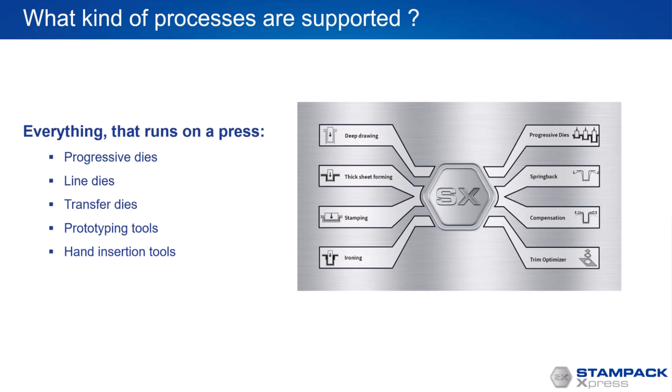Okay, now let's go. First part of today's agenda, how to get the best Springback results. I mean, that's a key question, and we could make an entire webinar on this topic. But I just want to give you a short overview of Stampack solver and why is it different to other solvers on the market. So in Stampack, you can make a shell simulation, and shell simulation means that the sheet is discretized with triangular shell elements in the middle surface.

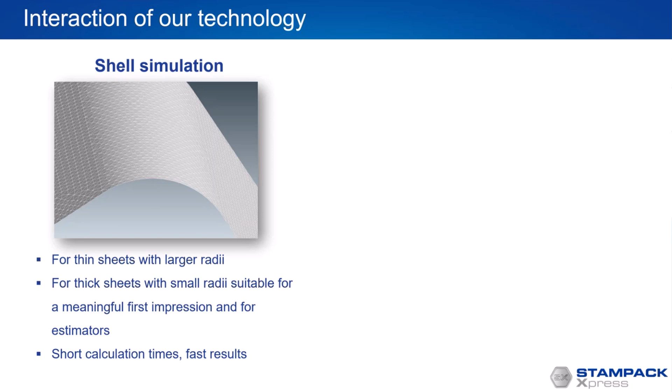And for us, it turns out that for thin sheets with larger radiuses, for example, for car panels, we have very good results in our shell simulation. But when the sheet gets thicker, so 2 millimeters and above, then when you hit the sheet with small radiuses, then the results in shell are not so good. But still, it's quite valuable because computation time is fast. So the benefit of shell simulation is basically, it's fast to run a simulation. You get a fast feedback, and you get a meaningful first impression for every kind of part. So this is what I mean with Stampack Express should have fast computation.

On the contrary, in Stampack, you can also perform a solid simulation. And solid simulation is what I mean with reliable results. Solid simulation, you see here the sheet is covered with hexahedral elements all across the thickness, and you have a very physical contact on the top side and on the bottom side.

And so stresses and strains along the thickness are considered. So you get high precision not only in the plane but also across the thickness. And this is very important in case of thick sheets and very important whenever we speak about compression.

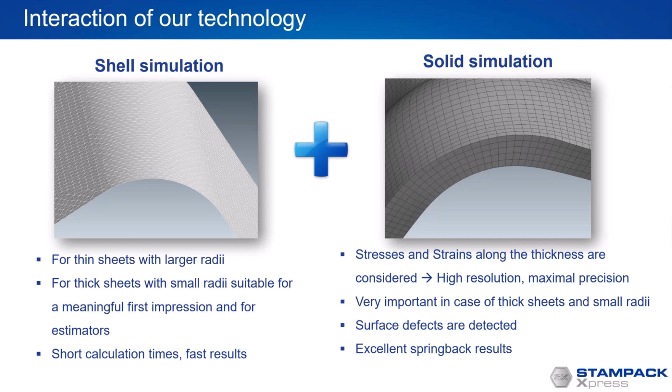A quite nice benefit is that you can also see surface defects, and there is one key aspect that makes sure that very good springback results are only possible in solid simulation, and this is what I try to explain to you now. So due to the physical contact here on top side and on bottom side, you have a very physical compression behavior in solid simulation.

And I have here now a very easy example. So an example that is not difficult at all. And in this example here in this corner, I think the sheet was 2 millimeter in the beginning, and we have a lot of thickening, I think. And at the end, when the press closes, then the thickening is compressed.

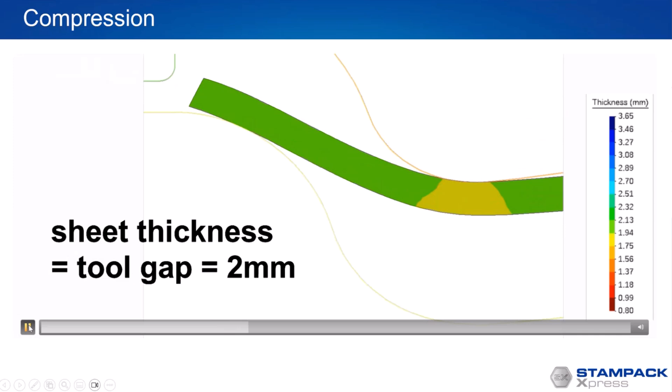And now we will take a look how shell simulation simulates the compression and how solid simulation simulates the compression. And then we will take a look on the springback behavior of this part. So first let's take a look on the cross section in solid simulation. So you have here some thickening, and when the press closes, let's take a look.

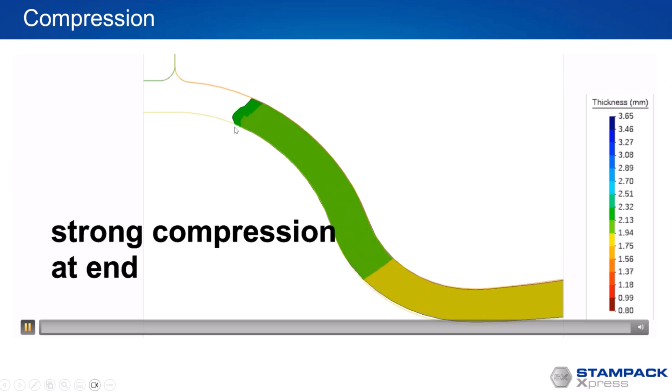Then, let's say by contact, the sheet is compressed, and in the middle of the process, it thickened more than 40%, but at the end of the day, it's fully compressed down. So we need a lot of force to close the press here. And so this is in solid simulation. You see here what I mean with a very physical contact on top and bottom side.

And okay, now we take a look on this very corner that we saw in the cross section some seconds before. And you see here 0.35 millimeter before the press closes, shell simulation and solid simulation have quite comparable results. So a lot of thickening in this corner. And then when the press closes, the solid is compressed, and the shell is not. So the shell cannot show the compression behavior very well.

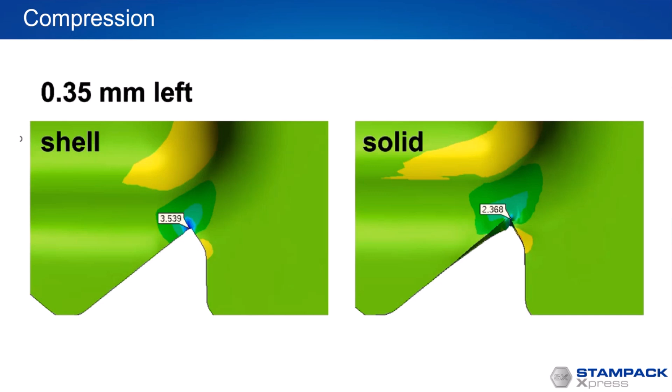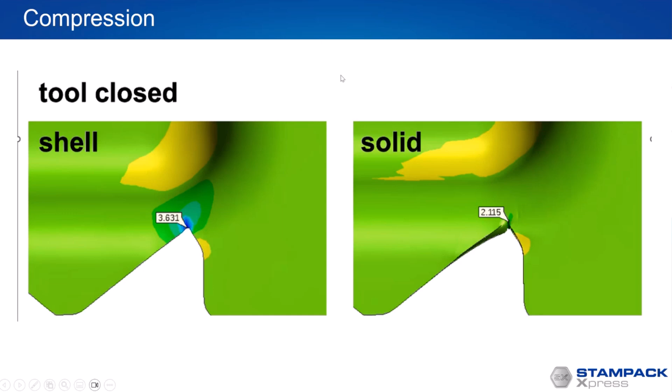And finally, when the tool is closed, you have a huge difference in thickness here between shell and solid. So in solid, you're compressed almost to the initial gap of 2 millimeter, and in shell you still have about 80% thickening. And this effect has a huge effect on the springback afterwards, because you can imagine in solid, when you compress the sheet, you introduce a lot of strains along the thickness that afterwards stabilize the springback because you have more plasticity in the part.

And then when we take a look on the springback displacement in Z direction, then you see, okay, the general behavior is quite comparable between shell simulation and solid simulation. But the magnitude is totally different. So we have here in shell 4 to 6 millimeter springback in this area. In solid, you have only 2.7 millimeter springback in this area.

And you can imagine we want to speak about compensation now. And if you don't have a good result, if you are 2 millimeters off in the springback calculation, you can never compensate this very well. So the key takeaway should be at this point, to have excellent springback results, you need solid simulation, and the better your springback results are, the better your compensation is in the real world.

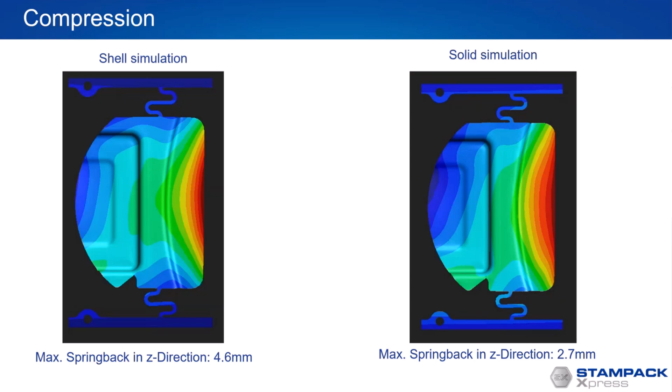I mean, this shell and solid is a deep topic, but we will push on now to springback compensation. And we start with a short explanation. What is springback compensation? And I try to explain it in a nutshell. So our initial situation is typically like this. I have here a nominal part, and typically in the first attempt, we form the part to the nominal part. We take the part out of the press, and it sort of jumps up.

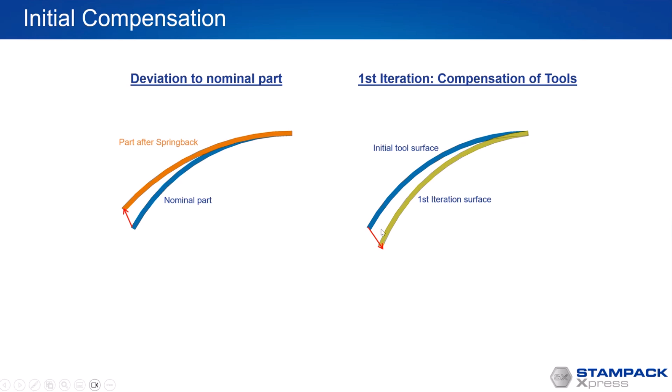And so we get here a deviation vector, and the first approach to compensate the tools: the initial tools here on the right-hand side are typically at the same position as the nominal part. But we compensate in the reverse direction to get better tool surfaces that, let's say, counteract the springback. So we sort of measure the deviation field and apply it in the other direction. So this is the first attempt.

And in the second attempt, we will find that when we form the part to this shape, again, we have some jumping up, and we are closer to the nominal blue, but still we have a deviation that is hopefully much smaller than it was before.

And in the next attempt, we just apply this short deviation field, and we apply it again to the tools to get, let's say, the tool surfaces of the next iteration. And in this way, in a very iterative procedure, I try to improve my tool surfaces so that I'm at the end of the day very close to the nominal part, and that my part is in tolerance after springback.

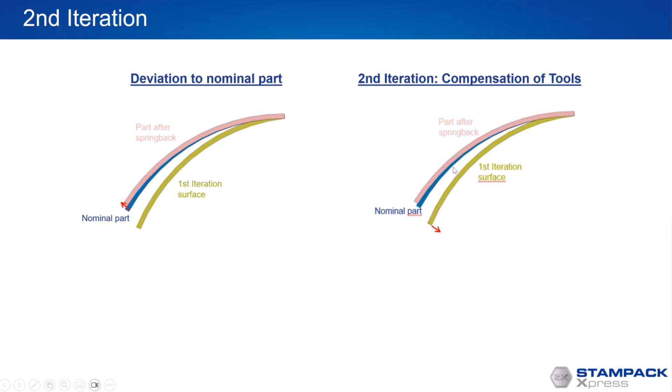So what you have to know is before springback, I'm far away from the nominal, but after springback, as it is in real world, I should be in tolerance with the nominal part. And the takeaway of this short description in a nutshell should be that springback compensation does not reduce the springback at all. It counteracts springback, and it counteracts springback in the opposite way.

And I have seen in many softwares the possibility to counteract, for example, with a factor of 1.1 or 1.2. And people claim that they have very good results with this, but it's not true because in some areas you need to compensate 1.1 times the first iteration. In some areas you need to compensate with 1.2 times the first deviation, and since we have these differences all over the sheet, we need to apply it in a very iterative way, so that we step by step locally improve the part until it's in tolerance.

What we can learn also from this description is that we need some sort of measurement functionality. And I think you all know that measurement is a very, very deep topic, and you can spend years on measurement, and it makes a key difference how to measure springback and how to measure the deviation to the nominal part. But for sake of simplicity, we will not touch this deep topic in today's webinar. So if you have questions or remarks on this, please contact me after the webinar.

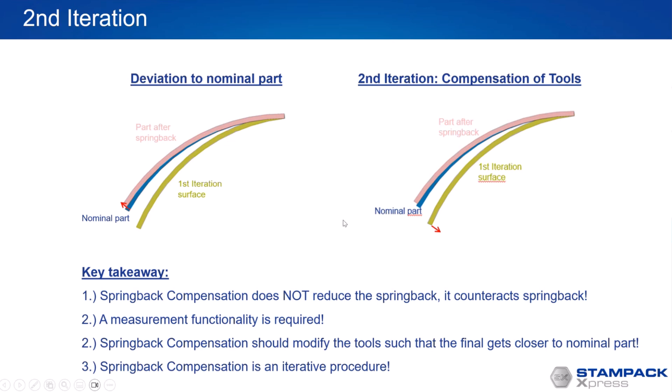Okay, quite clear is that springback compensation should modify also the tools, and it should modify the tools in such a way that we can perform the iterations one by one without touching the surfaces manually. So we want to not touch the surfaces between the iterations, and this is what Stampack's compensation does.

What are then the key properties of Stampack's compensation algorithm? So basically, Stampack's compensation algorithm takes 5 steps that are each very interesting and very deep. So the first one is what we call the tolerance check. So it's a measurement of the deviation to the nominal part. Then next, the tools are compensated to counteract the springback.

So we take the deviation vector from the tolerance check, and we revert it on the tools, and we make sure that our algorithm is iteratively applicable, which means that we can rerun the simulation at any time with the new tools. And then there are 3 specialties in our algorithm that are all very interesting, and we will discuss them in what follows.

So the Stampack algorithm avoids undercut in vertical walls. It allows constraint areas on the tools, and it is length of line preserving. And I think we should speak about this in detail.

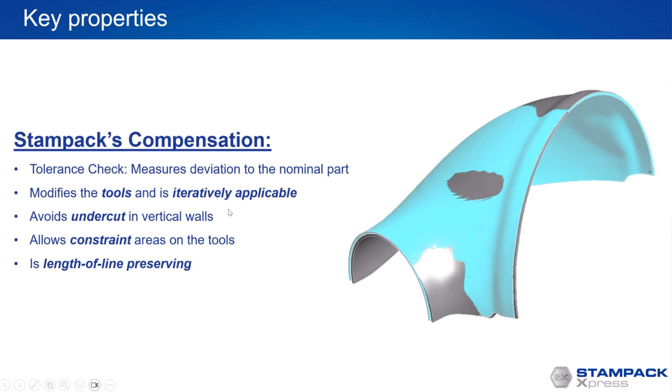So first, just that you get a feeling for how the measurement looks in Stampack. So measurement means I import a nominal part and I perform a measurement against it, and I get here a color map, and I see exactly how far I am away from the nominal in each part of the sheet. And this is very convenient because typically I know from my CAD drawings, okay, here my tolerance is maybe 0.5, here it's 0.6, here is 0.1, and then I simply can take a look here on the color map, and I can check the tolerance in a very easy way.

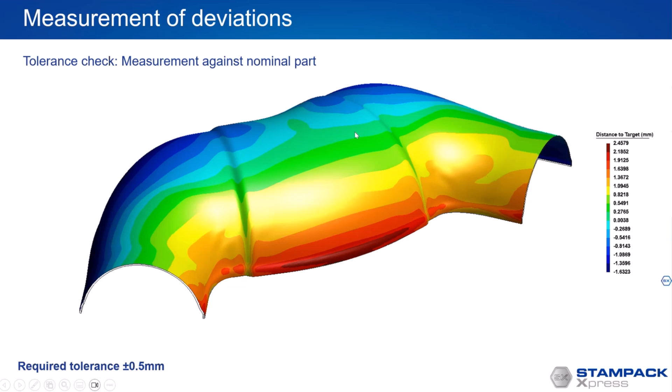Okay, I think it's quite clear what I mean with modify the tools, and that's why I jumped directly to the topic of undercut, or some people also know this under the wording negative angle. And in springback compensation, we typically have an issue whenever a vertical wall is involved. So in this part, we have a vertical wall all around the part. And I think you all know that when you have a vertical wall and you have to compensate this, it might be that you are in trouble because you fall into negative angle.

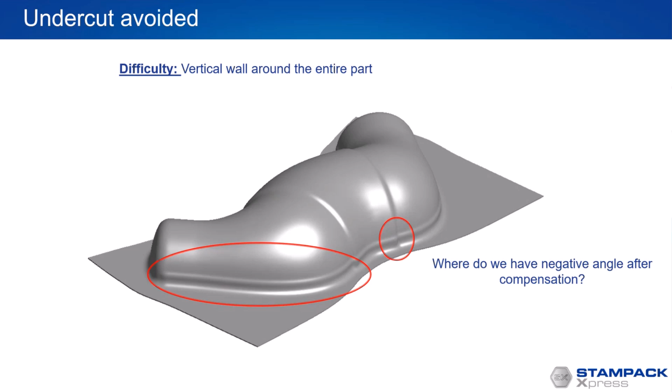But when you do this by hand, how can you know where you have negative angle? It's completely unclear. I mean, it could be here, it could be here. At the end of the day, we simply don't know. And that's why we integrated a functionality that we call remove undercut, and it's just a checkbox to activate. And with this, you can avoid the undercut.

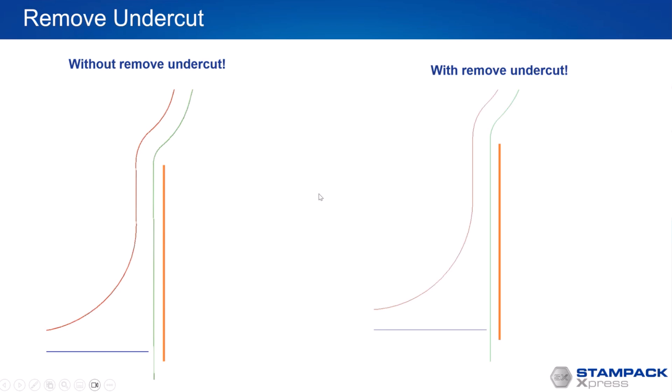Okay. What is also a key step in Springback compensation is that we cannot compensate all the surfaces, because in a part like this, you have here the blank holder area, and this is typically the draw-in area where the sheet is at the beginning of the simulation, and you need a very smooth draw-in in the whole part. And if we would allow compensation in this area, this surface would get a little wavy, I would say. And this is completely forbidden. So we need a tool that says, okay, in this area, compensation is not allowed at all.

And in Stampack, it works in the following way. So here on the blank holder, we can say, okay, we don't allow compensation here. We constrain X, Y, and Z, and we fix it so that we don't have compensation at all. So this is mandatory for a good compensation of tools.

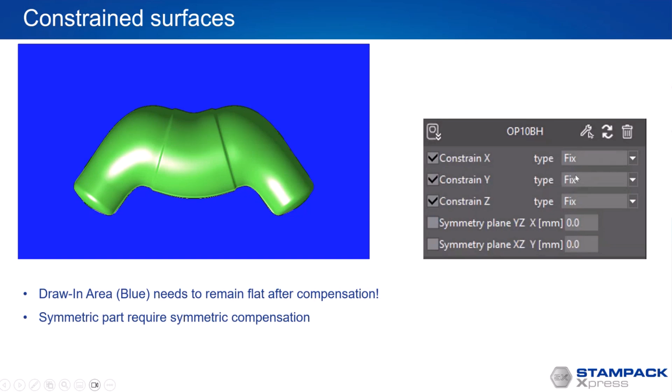And what is also very interesting, especially for symmetric parts: when I have a symmetric part, I will want to compensate on the left-hand side in the same way as on the right-hand side. That's why we also have these symmetry constraints, but they are less important than the fixing constraints that I need in almost every compensation procedure.

And how does it work? I have here an example to explain it. So here on the left-hand side, we have an unconstrained area where we perform a normal compensation. And imagine here on the blank holder, we have the constraint, so we don't allow the compensation here. And I think it's immediately clear to you that this cannot work, because when I have compensation here and no compensation here, there would be a very sharp border between these areas.

So I need a smoothing zone in between where I interpolate between the compensation area and the non-compensation area. And this is a smoothing zone. We apply this smoothing zone automatically, so the user does not have to take care of it. It's very convenient to use because from our software point of view, the user does not really see this smoothing zone, but it exists. And when you think about it, it is clear that it has to exist.

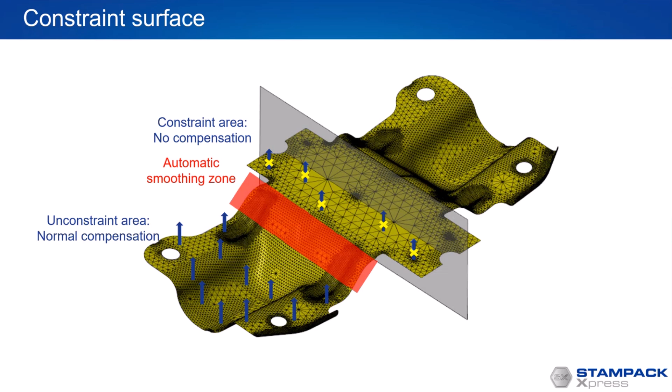And the last thing, and that's also very special to Stampack's algorithm, is what I call length of line preserving Springback compensation. This can be explained very well in this top hat profile. It's made of high strength steel, has a lot of Springback, and I think it's 20 millimeters here. This is the part after Springback. This is the compensated part.

And when you compensate this in a naive way with a simple projection, like compensation tools in CAD software do it, then the length of this line here is increased by the projection. You have a nominal in between, it's simply projected downwards, and then the lines get longer. But this is not working well, because imagine we make 4 iterations in our Springback compensation, and each time we add 15 millimeters here, so it does not make any sense.

I know that this is a part especially designed to show this effect, but even if you just compensate 5 millimeters, and in each iteration you add 0.5 millimeters, then after 4 iterations you added 2 millimeters of length on the lines, and you get a completely different part, and you can never be in tolerance. So it's a key feature of Stampack's algorithm that we preserve the length of line.

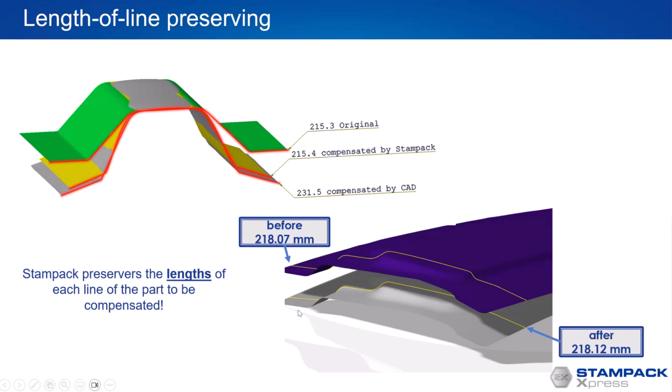Just to give you some examples. Our compensation algorithm is now on the market for I think 1.5 years, and I would simply like to share some customer experience with you, where you just see the progress on how quick the compensation is converging.

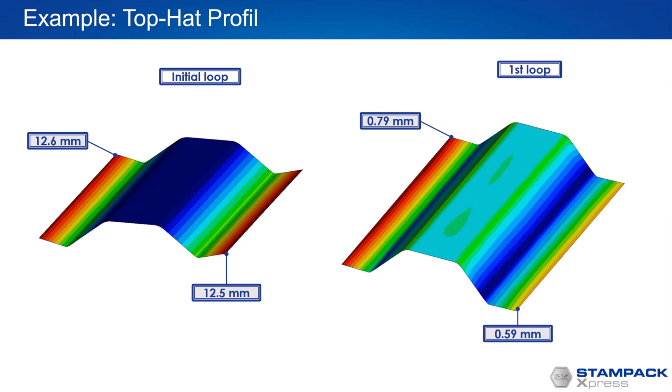So we have here a version of the top hat profile we spoke about. It's 12.5 millimeter springback, and already in the first loop we could get a deviation of 0.59 to the nominal and 0.79 to the nominal here in the other corner. So in this kind of very easy part, we have a very fast converging behavior, and you don't need many iterations. In more real-world examples, it's a little different.

So this is a B pillar, for example. In the B, I think we had a maximum deviation of 4.48 here in the corner, and then you see how the algorithm works. So here it sort of overcompensated in the other direction. So we were above the part. Now we are here below the part, and only in the second iteration we jump now very close to the part as it should be.

And this is also something typical, that the convergence is a little unstable, in the sense that it's somehow overcompensating, and then step by step you come back and get better. But I think after 2 loops this is still perfectly all right.

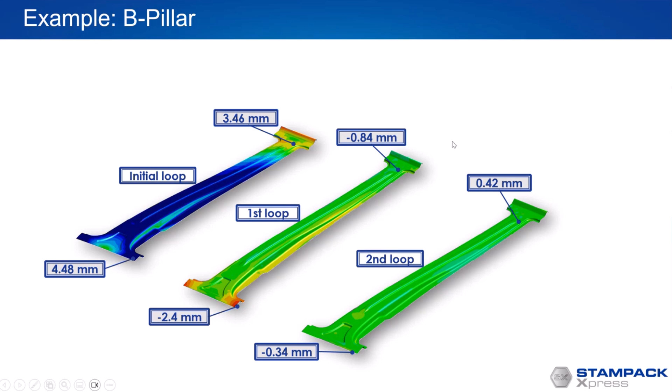And another example that I really like is an example of the company Pengfei in China. Here they had 2.8 millimeter springback on this part, but the part is special in the sense that it looks extremely easy. If you give this to anybody, maybe they will say, okay, you don't have to use simulation software at all. But they had very strict tolerances on it. I think the tolerance was 0.3 millimeter. And when you have these kinds of strict tolerances, then you have to go for it, and the easy part gets very, very difficult.

And here you can see how our compensation algorithm converged to the final goal. Here in the corner, it went down quite step by step. And here in the middle, it sort of overcompensated in the first attempt and then started to converge. So you see here also that the behavior is locally different. Here we have a very smooth transition, and here it's a little wavy. But this is very typical for a compensation, and with this you see that you cannot work without an iterative compensation approach.

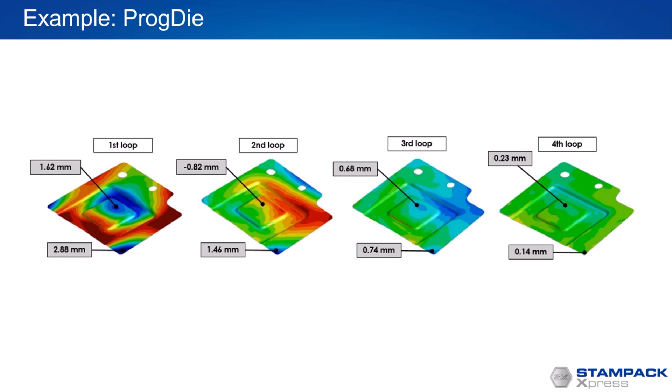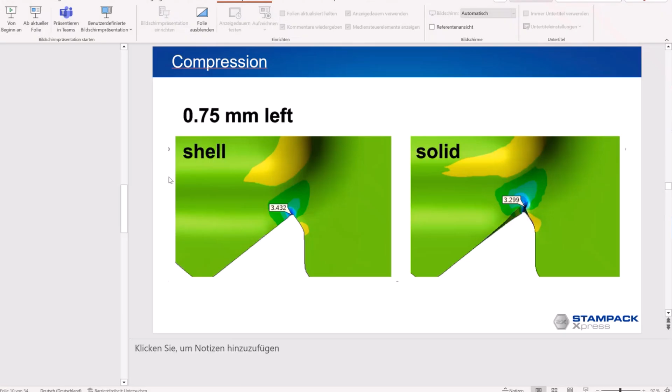Okay, that's it for the moment. I think we should now switch to Stampack, to the software, and I show you how to define a springback compensation, and then we can take a look on a result. And afterwards, I make some concluding remarks. So I prepared here a simulation for you; I don't want to define a simulation with you. We start to take a look on the process I have here; the simulation is already calculated. It's forming, cutting, springback, and I introduce you to the process, and then we check how we can define the compensation. So let's load it.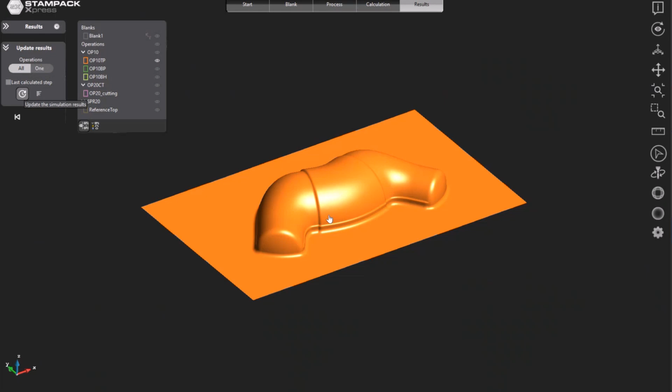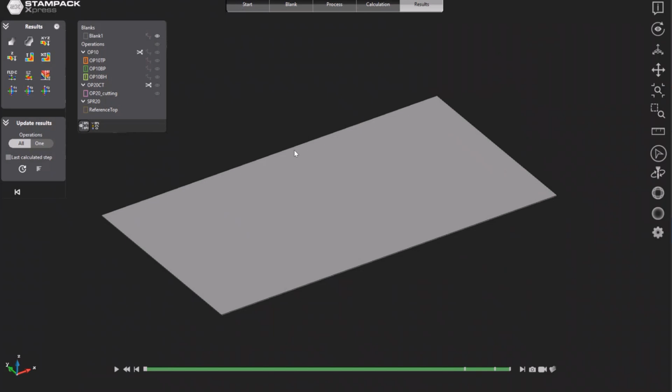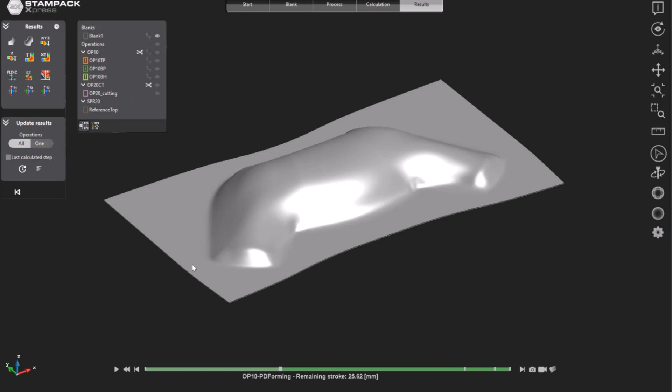So this is a very typical drawing part. I think it's 500 millimeters, a part that is in the exhaust system at the end. Just so you get a feeling how the part is formed, it's a classical drawing. You see here the blank holder area, and this is flat, and it has to remain flat also afterwards, after we compensated the tools, just to guarantee the optimal draw-in behavior of the material. And step by step, the part is formed. Then we have a cutting, and then we have a springback.

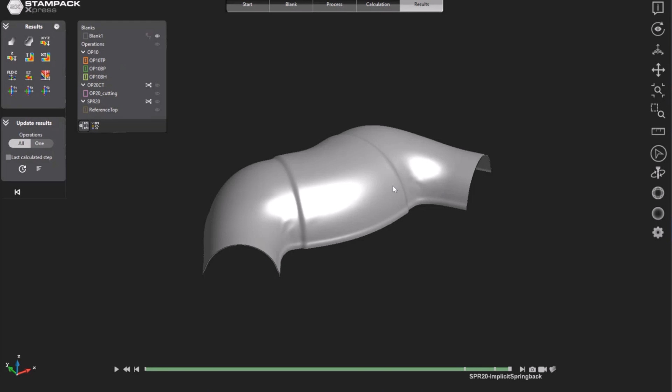And you have a lot of possibilities here in Stampack, and I think you all know about it. You can check whether the part is feasible or not. You can check the thickness behavior. You can check the wrinkling, but we will not do this today. We just do one thing: we have here imported a reference, and the part is measured against the reference. I think here it's the top side.

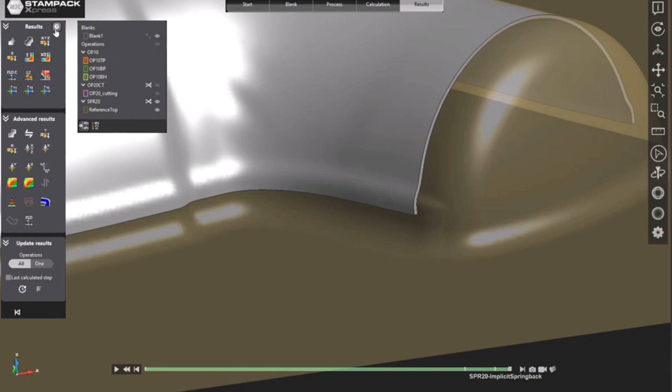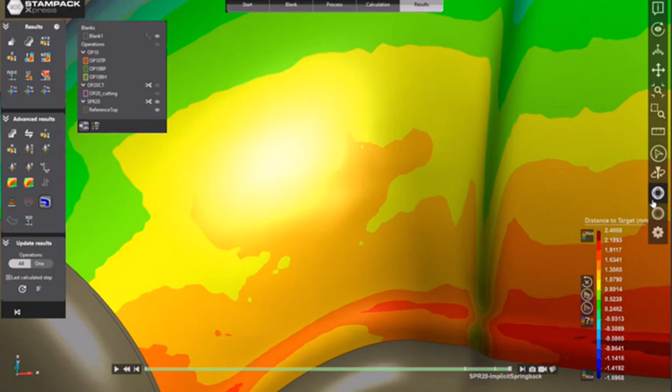It's measured against the top side of the tool, and with this color map, with this distance to target or tolerance check, you can see the deviations after springback. And you see here that we are 2.2 millimeters off, and in each point in the mesh you can visualize the distance to the nominal, and it's clear that we have to do something at this point.

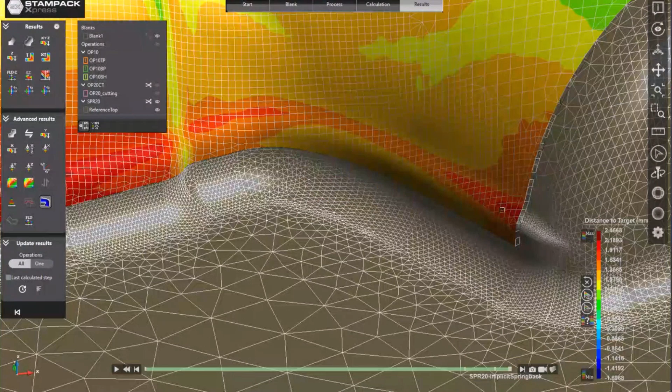I think the tolerance here in this area was maybe 0.5, and I think here more outside it was 0.75 or something like this. But definitely we have to counteract the springback. And now we will take a look how to do this.

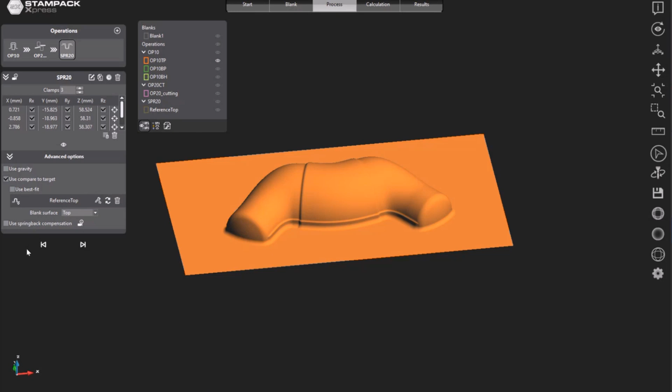So I go back to the pre-process, and we are here in the springback operation. So here's the forming, cutting, springback, and in the springback what is already defined is our tolerance check, that is the compare to target functionality. And what we are going to do now is we use here the springback compensation. And to do it, I have to import the tools that I want to compensate.

So we have here the top, the bottom, and the blank holder, and in this case they are imported as Parasolid files. So the ending was x_t, but equally you can import CATIA, NX, Creo, STL, IGES, STEP. So you have the full freedom here. And okay, I import them. And I have them now here in the so-called warehouse. And warehouse is a location for geometries that are not yet assigned.

And I pick them, and then let's say I add them to the compensation surfaces. And I have three possibilities. So I can add a compensation surface. In this area, this surface is compensated as it is. I can add a constraint surface. So constraint surface is what we will do with a blank holder. We will take a look on it in a second.

And we can import also cutting lines. And this is because in some processes, we also have to arrange the cutting line, because when we compensate differently and we have, for example, a laser cutting, then we also have to change the cutting a little. I think that's quite clear.

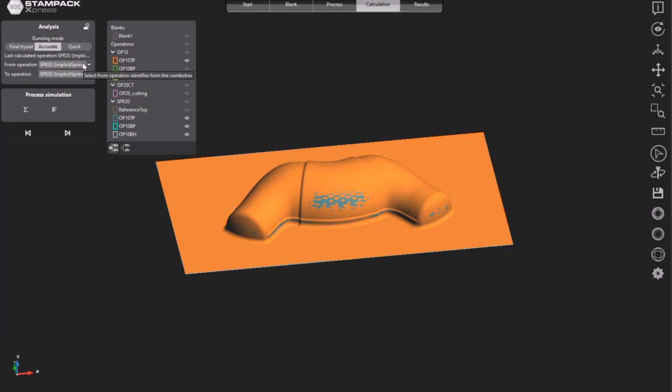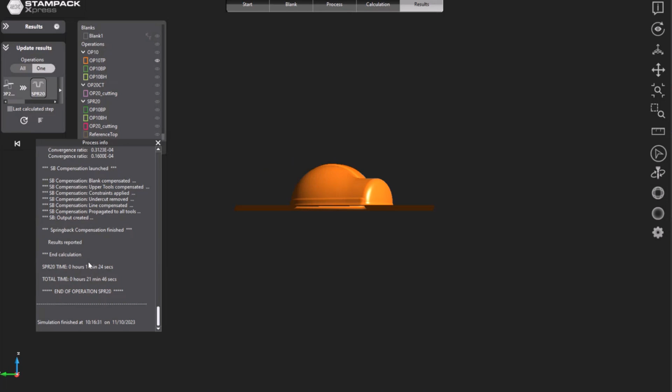And now we have to press on calculate. We just have to recalculate the springback operation and the compensation. And I don't want to do this right now because I calculated it already for you. Let's take a look. The compensation time was 1 minute and 24 seconds. The total simulation time, this was simulated in solid, was 21 minutes, just to give you some insights. And I load this now, the compensation, and then we can take a look on what happened within this compensation.

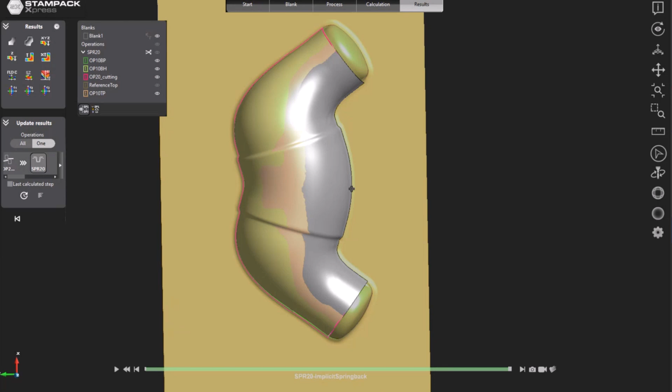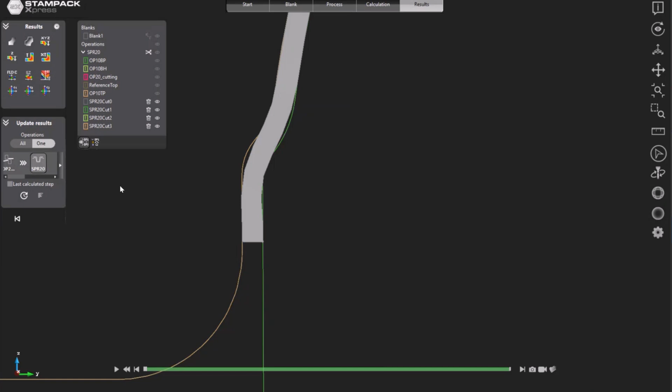And just to explain it, I make a cross section. And what you see here is, zoom out a little, so before springback, the tools and the part are in the same position. And what will happen now is the part is going out because of springback, and then the tools are compensated in the reverse direction, and they are compensated in such a way that we don't fall into undercut. So this is how it works.

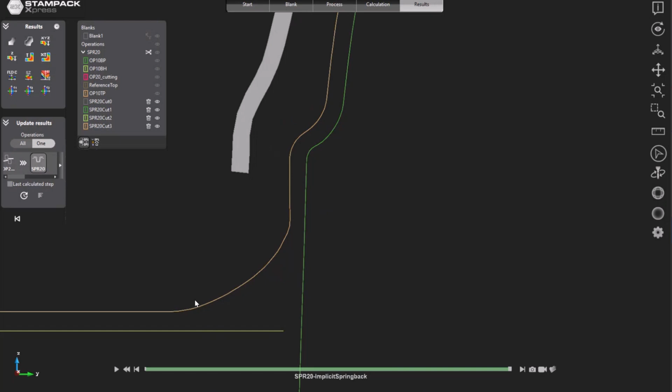So you see the compensation algorithm is making this radius a little larger, but what you can also see very well here is that the tool gap remains constant within the compensation procedure, which means, and this is mandatory, that you can restart the simulation again and get a very good result once more. And this is how it works.

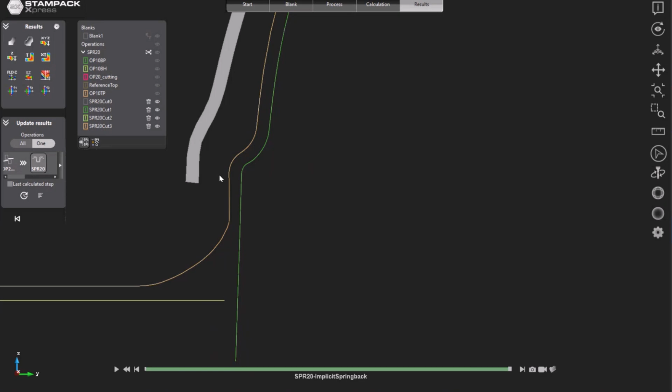And now in this way, I generated new tool surfaces. And I can take now this new tool surface and restart this procedure. And then step by step, in an iterative way, I get a part that is in tolerance. And in this case, it took 3 iterations.

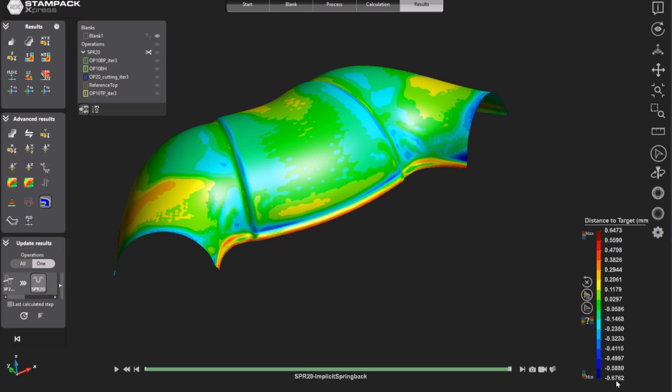And I want to show you now how the distance to the nominal is now. So we have here again our distance to the nominal functionality, and now we can see, okay, the maximum deviation is 0.64, the minimal minus 0.67, so it converged in 3 iterations. And what we see here, that we are quite close here in the center, and just here below,

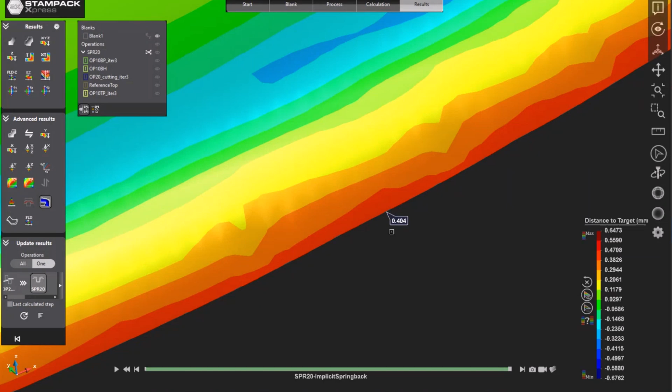we still have some deviations, and this is because of the remove undercut, because I cannot compensate exactly in the way I want to do it, because I have to ensure that the vertical wall remains vertical. But still, if you remember, before the compensation, we were here 2.7 millimeters away from the target. Now we are 0.4 millimeters away from the target, and this is simply fantastic.

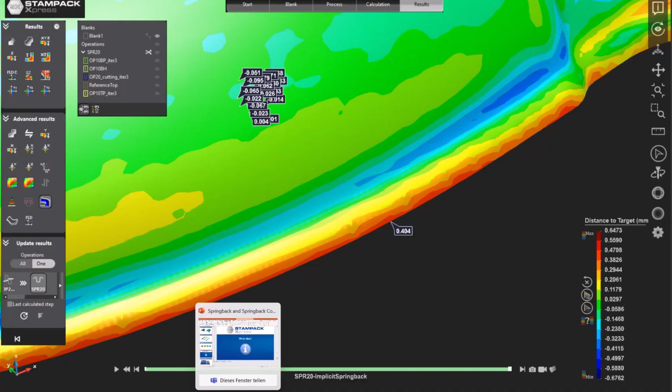And now you can export these new generated tools to CAD, and you can continue to work from the CAD side. So this is how it works. So that's all about the real world example. I jump back to the position where we were. So what else is interesting?

So besides Springback compensation, you have several possibilities in Stampack. So I want to give you a summary of all the possibilities you have. So there is the basic module to define the simulation and to take a look on the results. So this is what we have seen. And in the basic, you can calculate the shell, you can calculate the solid, and you can calculate the Springback.

And then there is a module called Measure and Optimize, where you can make the Springback compensation that we have seen right now, where you can make the trim line development with the trim optimizer, and where you can use the tolerance check. So that is the measurement against the nominal. Then there is a module called Import to Mesh, where you can import native CAD data.

And 2 things are very interesting. So if you are in Stampack subscription, the floating is included. And also very interesting is the free viewer. So we have many customers that have maybe 1 license of Stampack Xpress, and they have many viewers in the company. And so you can share simulation results with your colleagues in a free way, and they can take a look and learn from the simulations without the need of another license.

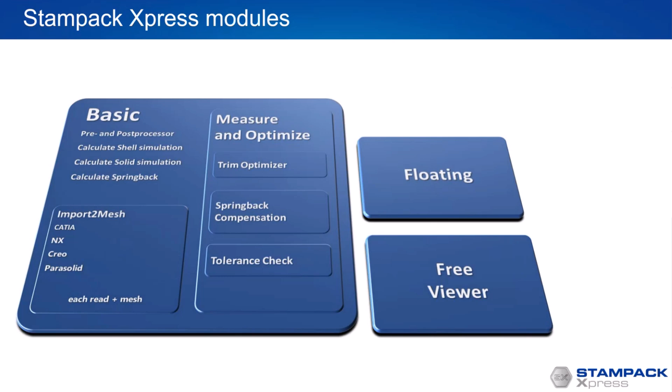What I think is also interesting, when we speak about Springback, it's a key topic because Springback results are highly influenced by the quality of the material data, and we have about 570 material cards inside Stampack, and we work together with the suppliers Bilstein, Salzgitter, Tata Steel, voestalpine, and ThyssenKrupp. And they bring their materials directly inside the software, also with the most modern anisotropic models. And so it helps us to predict the Springback very well, and I'm very happy that these companies worked with us together.

Our materials are all in all for steel, aluminium, stainless. So what we have seen in the simulation right now, this was a stainless AISI 304, and we also have a database for copper and brass. So we have a good range of materials and also some Inconels.

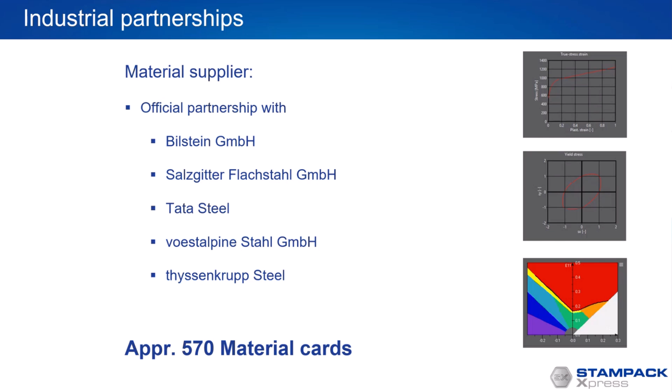Which companies use Stampack Xpress? So I don't want to show all the 132 companies, but just that you get a feeling. So Magna, this is Cosma Die Technology in Detroit, is using Stampack, especially for thick sheets. So they work a lot with our solid simulation. Allgeier Automotive, big supplier in Germany. I think Daico, Denso in Spain. And for example, Sonaca and Bombardier are more from aerospace industry.

And maybe you also know Kirchhoff. That is a global automotive supplier. Or Samsung is using Stampack Xpress for household parts, so completely different topic than automotive, but also quite challenging. And what you may also know are some Japanese companies, Toshiba, Fuji. They are more in the business of electrical connectors.